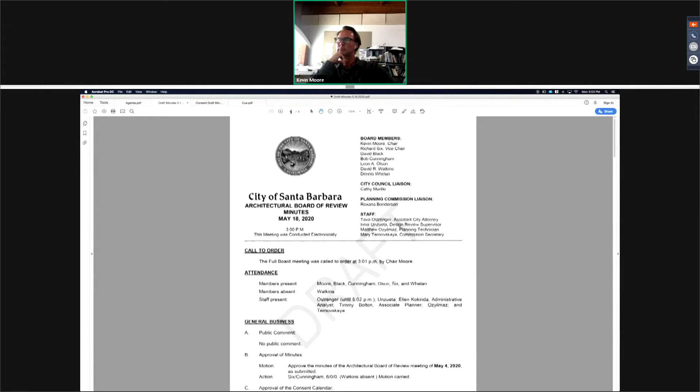Yes, if we go to page 6 of 6. Okay. So under my comments on this particular project, what is it?

200 Helena Avenue. I'd like to change my comments after the words, but he would like input from the Historic Landmarks Commission. I would like to say he would like to be informed of the process to get comments from the Historic Landmarks Commission. I wasn't ready to go to landmarks right away, I just wanted to know what the process would be.

So Mary, did you get that? Yes. So it would read, he would like to be informed of the process to get comments from... Okay, and then on that same comment, just to clarify, the last sentence: he would like the applicant to consider making the stairway exit out to the roof inboard of the perimeter so that the roof can be sloped down.

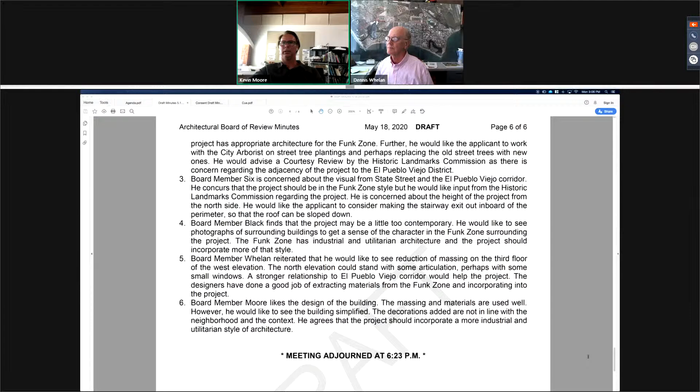Are there any additional edits or comments? Okay, does the maker of the motion accept those two changes? Yes. Okay, and the seconder? Yes. Okay, so why don't we get everybody on screen, and let's do our roll call vote.

All right, this is Mary, I will take the roll call vote. We have Chair Moore, yes. Vice Chair Six, yes. Board Member Black, yes. Board Member Cunningham, yes. Board Member Olson, yes. Board Member Whalen, yes. All right, motion passes.

Okay, we'll move on now to the consent calendar, approval of consent calendar minutes for May 26th.

All right, Mr. Chair, if I could have those pulled up. Perfect, thank you Timmy. Sorry, my cat's in the way. You've got to move. All right.

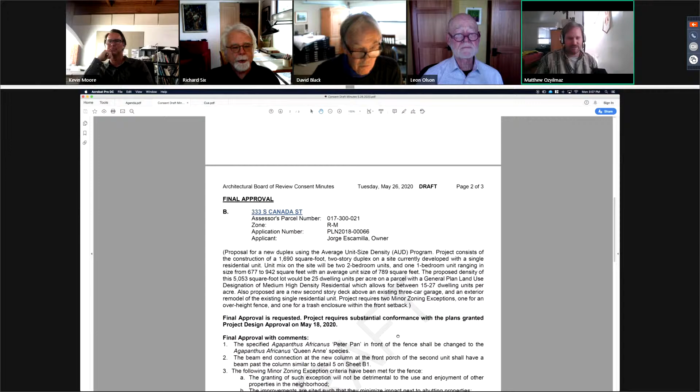Item A, 2520 Bath Street received approval of its review after final with comment. Item B, 333 South Canada Street was given final approval with comments. Item C, 29 South Milpas was given project design and final approval with comment. And I believe that was the end of the agenda.

Okay. Somebody want to make a motion for approval? I move we accept as presented. Okay, first by Mr. Olson, second by Mr. Black. Any discussion? No? Okay, let's have a roll call vote.

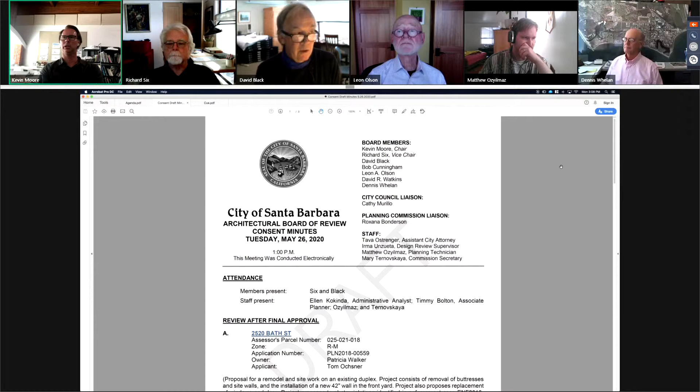Okay, this is Matthew. Mary, you may have to turn off your camera so we can have all six of us. Sorry. Okay, there. I'll take... we go.

We'll take the roll call. We have Chair Moore, yes. Vice Chair Six, yes. Board Member Black, yes. Board Member Cunningham, yes. Board Member Olson, yes. Board Member Whalen, yes. Okay, motion passes. Okay, great.

Thank you, and now moving on to June 1st. Mr. Chair, we did not have consent today, it was canceled.

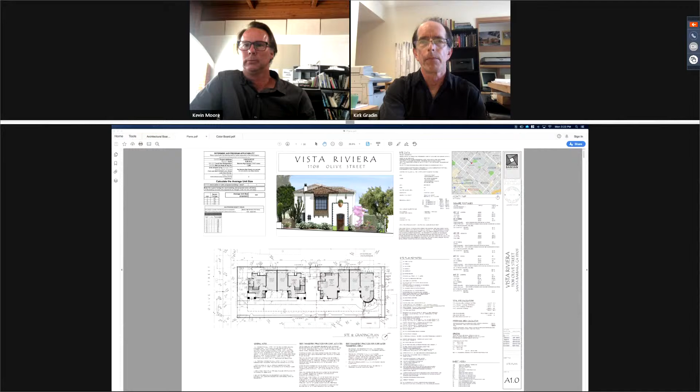There we are. Welcome back. And forgive me, Mr. Gradin, if you wouldn't mind unmuting yourself. You're currently muted. Yes, there I go. I just successfully was able to do that. Thank you. Okay.

Yeah, if you could introduce yourself and go through the changes to your project. Okay, so I'm getting some background noise right now. I'm just wondering, Kirk, if you could—do you have any headphones you could use, or are you using your computer's audio, or calling in by phone? I'm using my laptop audio. Okay, that sounds better. I don't know, I was just getting some feedback. Please go ahead when you're ready. It sounds like it's okay now.

All right, thank you. Kirk Gradin, architect for the project. It's been a while since we've been in front of the board with this project. It was July last year, as we just heard. It was appealed to City Council, and the council denied the appeal on September 24th. So we're now back with very minor changes, and also some additions addressing comments regarding the landscaping from the last time we were there. We also have a full set of plans now with architectural details, lighting, and so on.

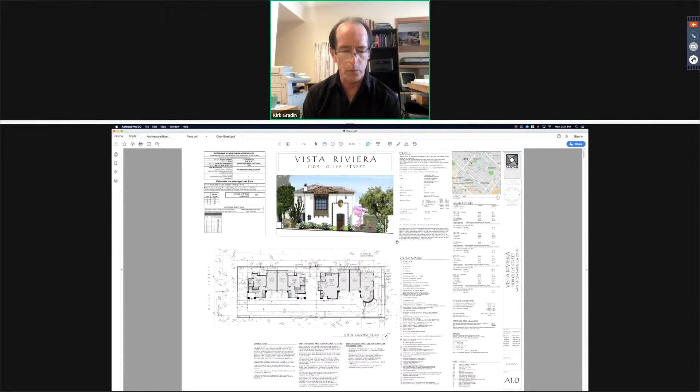Since we're looking at the site plan here, we did have a change in square footage, which was a reduction in Unit B, the second unit from the street there. It was just a small reduction of unit size from 861 to 824 square feet, so a little less than 40 square feet eliminated. That was due to increasing the size of the yard between the duplexes—that's how that reduction was made.

Because of some minor changes to the grading in order to make it work out with the civil engineer's design, we also have some steps now. Unit A, on the south side at the bottom of the page, going up to the entrance, there's 2 steps. Same at Unit B, there's 2 steps, and then there's just 1 step at Unit C.

In addressing—you'll see this when we get to the landscape plan—the issue having to do with the trees we had planted along the south side property line, we now have some tree wells that are drivable with tree grates along that south border. You see those 5 little bump outs, and then there's some planting changes. Well, I'll talk about the other changes as we go through the drawings. So we can go to the next sheet, which is floor plans.

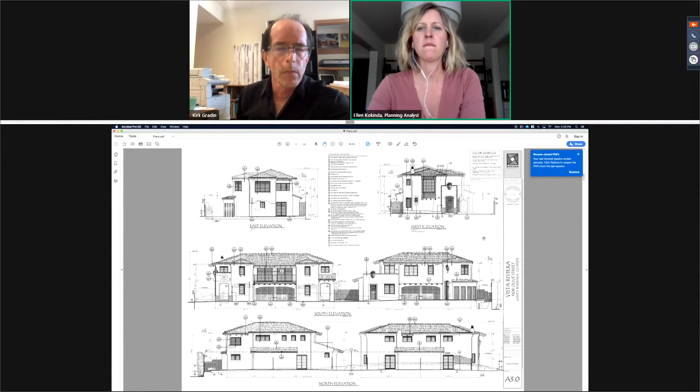Those board members who were present for the previous review last July may remember these elevations. There are very minor changes that have occurred. As I mentioned previously, at Unit A towards the street, there's a couple of steps that were added at Unit A and B at the entrances.

Actually, this also, because of the grading - initially we were thinking that we would be able to slope both the north and south sides of the property all the way to the street, continuous drop. But on the north side, because of that narrow area between the building and the neighbor, the civil engineer worked out a different program where he's actually sloping in 2 directions at each unit. So that fence that divides - if you're looking at the north elevation there's a fence at the first floor that divides Unit A from Unit B, and a fence that divides Unit C from D at the rear unit. Basically the grade slopes away in either direction from that fence to catch basins, and then that flows underground and exits at the street at curb level.

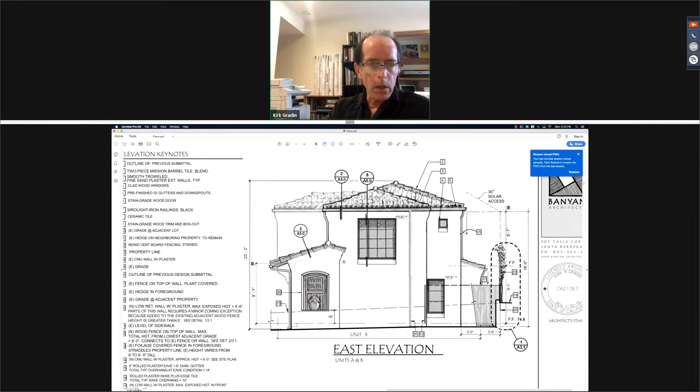Other than that, there was no change to both of these elevations on this page. Other than, again, you're looking at the back side of Unit A and B, and we have dropped the plate height there - you see it's 8.7 instead of 9.1 which is what it used to be. So we could go on. I don't need to look at these sections - architectural details.

You'll see these are very traditional in nature, recessed windows, two-piece mission tile with mortar bird stops. We have both the soft curving plaster eave in most cases, which is the third detail up from the bottom on the right-hand side. That's a typical eave, but there's also some instances where we have outriggers, which is shown on the next sheet. Most of these you'll recognize as being very familiar to the El Pueblo Viejo style in which we're working.

So we go on to the next sheet unless there's questions. Well, that will come later. There's at the bottom, in from the right a bit, the outrigger detail. The top right is the bay window at the street.

See anything else significant here? Grill detail on the bottom left. The kind of soft curving feature that we have at the garage door entrances is on the bottom left there as well. We have a couple of plaster columns shown near the bottom left. And then the wood, kind of fake wood post in between the garages, between units, is near the top left. So it's a wood veneer to make it look like a large post.

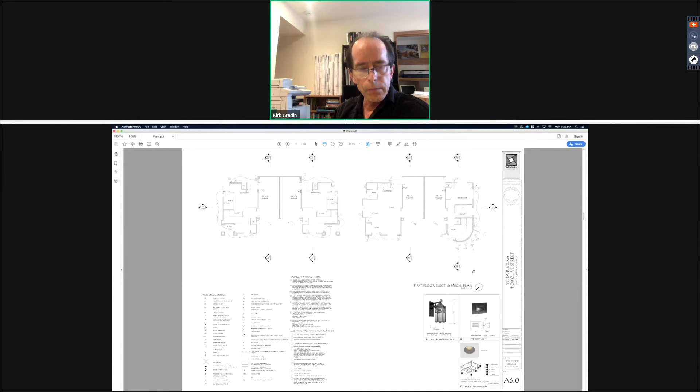I think we can go on. So, exterior lighting - we've selected a single Handelman fixture, and all the wall-mounted fixtures will be that fixture shown on the right in the cut sheet. Wherever we have step lights, they'll be covered with a downward pointing grill, also shown there. And we do have some exterior downlights that are tucked under overhanging plaster eaves, shown there - it's a very small recessed can with a 2-inch aperture.

So we can go on. Second floor lighting - there's not much there, and nothing visible from the street at the second floor. You can go on, please.

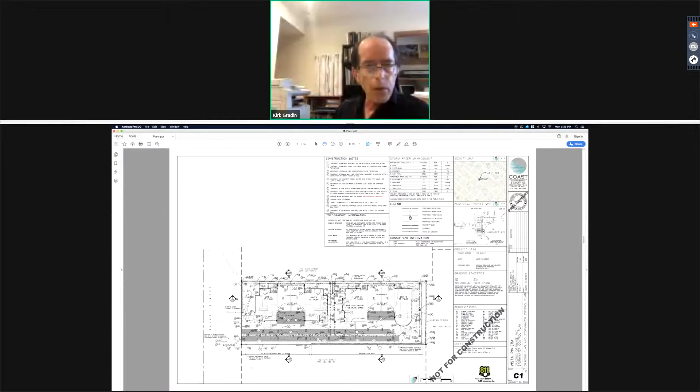Window schedule, civil. Civil engineering, I'm not going to help with this, go on. Go on, thank you. Next page, please.

So I think we missed the first landscape plan sheet. I think there's one prior to this, actually - L1.0? No? This looks like the hardscape plan to me, doesn't look like the landscape plan. It's not the landscape plan. So this is the hardscape plan. I think it appears that we're missing the sheet - I don't know how that would have happened. Either that or it's getting skipped over, because that's crucial. We need that landscape planting sheet.

But anyway, this shows basically we have three kinds of surfacing. The driveway is a permeable concrete, which doesn't require control joints, so there's none shown. The pedestrian pathway is a permeable imitation brick, and some of the other small patios are the same. And then there's a gravel that also works as a mulch for the planting area. So it's a xeriscape kind of look that we've been talking about and representing from the beginning, reinforced by that gravel base. So we can go on.

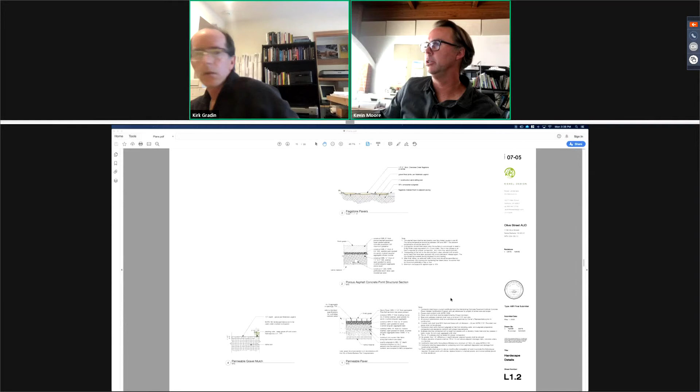And Mr. Gradin, unfortunately we don't see L1.0 on the plans that are on the city website either, so not sure what happened there, but let's keep moving forward. Mr. Chair - yes, there is a planting plan, L3.1. Is that? Maybe it'll take care of it. Let's take a look, let me see. Oh, there we go - yeah, there's irrigation and further on. Yep, there it is, 3.1 please. Oh, okay.

So the changes made here were addressing comments from last time. So this is a planting plan, very close to what was reviewed previously with a few minor changes. One of them that Mr. Cunningham, board member Cunningham, had asked for was a greater variety of canopy trees. So originally we had 5 olive trees along the driveway, and we switched one out to an acacia. So we now have 3 acacias - stenophylla, the shoestring acacia - 2 along the north side for screening, and 1 near the driveway entrance.

We also were struggling, going back and forth, along the north side of the property because the neighbor was concerned that we not put planting that was going to increase shading on their property. They didn't want anything along there that was going to exceed the height of the building. We experimented with different things, and what we've come up with is a series of Strelitzia nicolai, giant birds of paradise, that are basically not going to grow higher than the fencing and hedge that's already there.

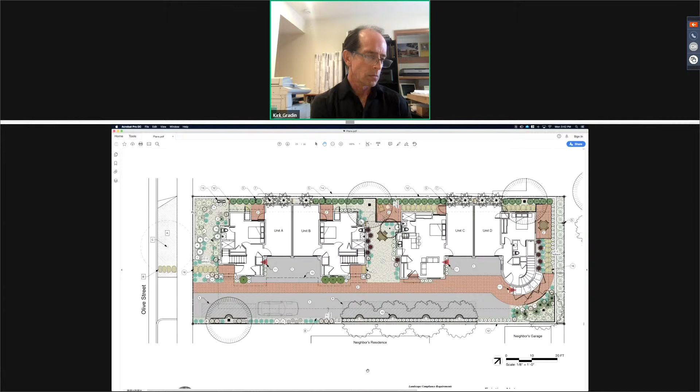Let me see if there's anything here in my notes that I wanted to mention. I think I covered it. Oh, there is - if you go further on, there's detail for the grates along the driveway and some other planting details. It's probably too far now, we're into notes.

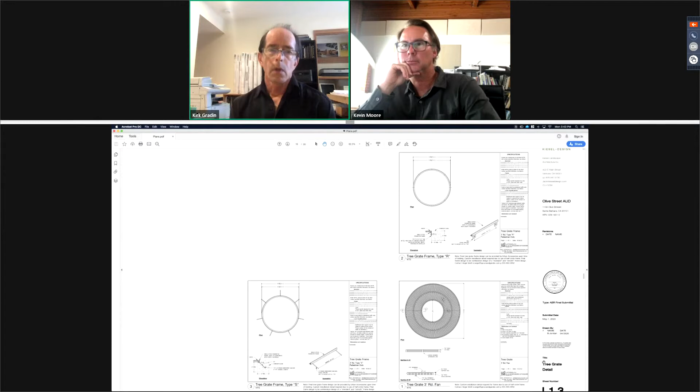And let me see if I can find the page for you now, where the grate detail is. There we go, L1.3. Thank you. That concludes my presentation.

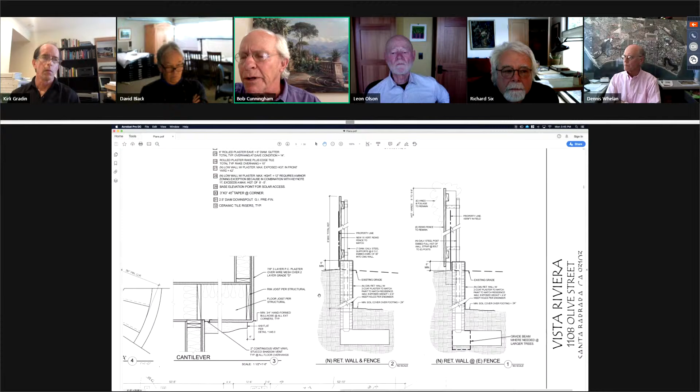On the north elevation, the window alignment - and I'm sorry, I'm skipping back and forth on drawings, so I'm going to challenge Timmy to find what I'm talking about - north elevation, units A and B, the 4 windows on that elevation are somewhat, I don't know, contemporary in appearance, and obviously very symmetrical on that elevation. Is it possible for you to vary those in any manner to give it a little more interest?

Well, I'm sure we could. For example, we could make one or more of them a single instead of a double, if that was desirable. The factor about the height of them, however, we feel pretty settled on, because we're wanting to maintain privacy in relation to the neighbor. So the ones on the two outer ends on unit A and B, the outside ones, those are both bathrooms, so privacy is especially a concern. The other two are bedrooms. But it was a request specifically by the neighbor to limit the capacity at the second floor for the tenants to view and look down into their yard and onto their building. So that's why the sill height is where it's at. Okay, I appreciate that. I'm just wondering whether you could vary the windows in any way to depart from the obvious symmetry. I know you've added the chimney and the roof pop-out on unit B, which is nice, but I think the window alignment is still somewhat monotonous, and I'd just like to know if you can vary that, even to a minor degree, to get away from that symmetry.

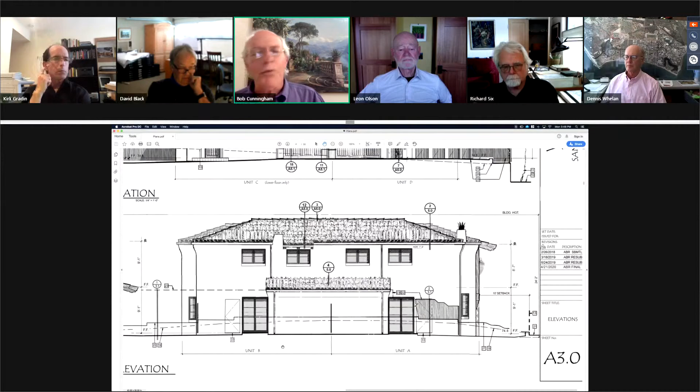Sure. Okay, thank you. Can you point out - and again, sorry to jump around here - on the irrigation plan where the backflow preventer is located? Yes, it's top left. Yeah, there it is, that little rectangular box there. On the north side, it's hidden by the retaining wall running along the property line, which drops the grade about 32 inches or so. And then there's planting as well to protect or reduce the visibility from the street. Okay, thank you, that's a nice location.

Final question. Can we go back to the planting plan, please?

Could I make one other comment about the symmetry issue? This was brought up and discussed on several occasions as we went through ABR, and also at the city council. My argument was that you find this as a very typical feature of traditional Spanish colonial and El Pueblo Viejo design and massing features, where there's both symmetry and asymmetry. The front two units are symmetrical, the back two are asymmetrical. That was kind of the play that we had going on.

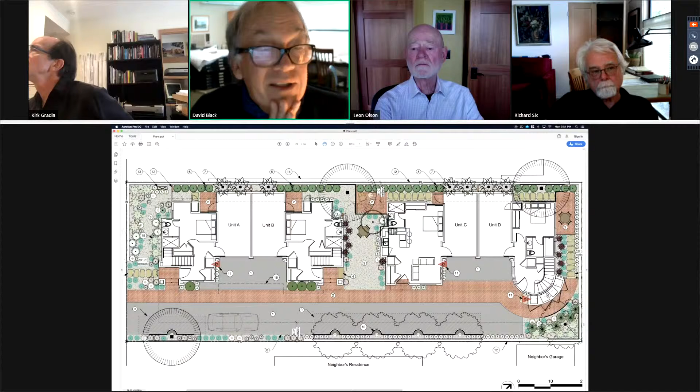Well, what does that dimension occur in the side yard there? How much room do you have to plant those? It's between the garages and the existing fencing, and the property line, I believe it's 3 feet. Those are not areas that you would need to access.

Well, except if you wash windows or paint the building at some occasion. There's no windows there, but yes, to paint the building you would need to get back there. 3 feet, I don't know, I'd like to get Bob's feedback on that too, but that plant is capable of getting quite large. So just a heads up for you guys. It will get some height, but 3 feet is not much room.

Since David mentioned my name, I would add that he makes a very good point. I think it's worth trying for the purpose that Kirk stated, but they will demand maintenance as they grow, and they'll need to be controlled because they can get huge. Just a heads up, Kirk. That's the only question I really had. Okay, Mr. Olson, any questions?

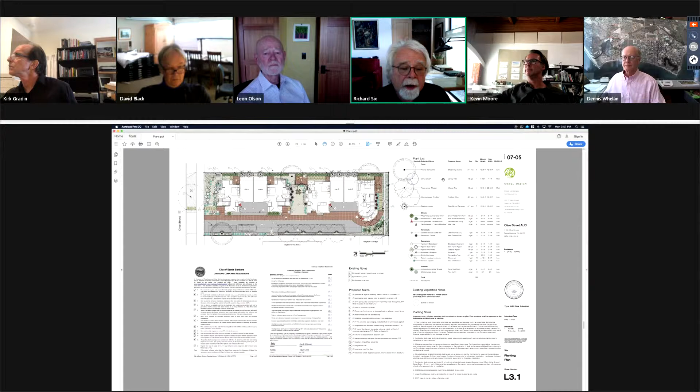You don't have a detail on the interior. I understand fully the details for the fencing along the north and south property lines, but what is the detail of the fencing in between the common yard and the middle of the project? Did you detail that, or would it be similar? No, we just call it out as one by redwood vertical. We do show it on the elevation, but it hasn't been detailed on the plans yet.

So it would just be a simple wood post and rails? Yes. And if I remember correctly, the reason you're not fencing the south or back property line is that there's already a huge hedge there by the neighbor? Right, there's existing fencing. Wherever we're not showing new fencing, there is existing fencing.

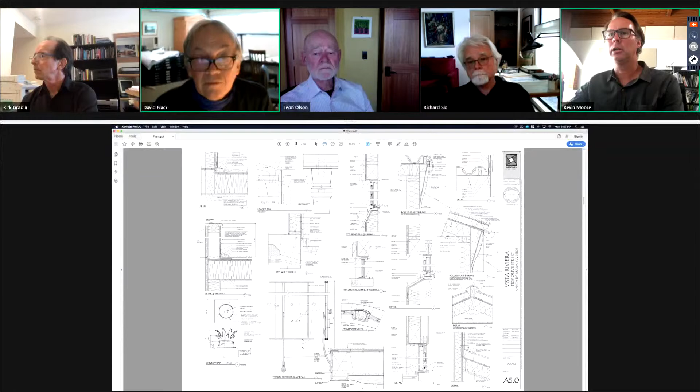Okay, I have no other questions. Mr. Whelan, no questions. I don't have any questions either. Did we get everybody? I think we did. Yep. All right, let's move on to comments and move our meeting along.

Let's start with Mr. Six for comments. I find it an exemplary project, with a few cleanup items such as making sure the specifications for the windows are on the plans, and the detail for the interior fence is on the plans. I don't have any problems with the symmetry of the windows on the front two units on the north elevation. Those are my comments, and I think it's ready for final.

Mr. Olson: I also think it's a handsome project and it's ready for final. Mr. Black: I would concur with those two comments.

Okay, no concerns for the landscape? Any comment there? Well, as I indicated in my questions, I think the use of the giant birds is somewhat problematic. I think the landscape architect should look at that and make sure he understands what he's getting, or what's going to happen down the road with it. So that's all.

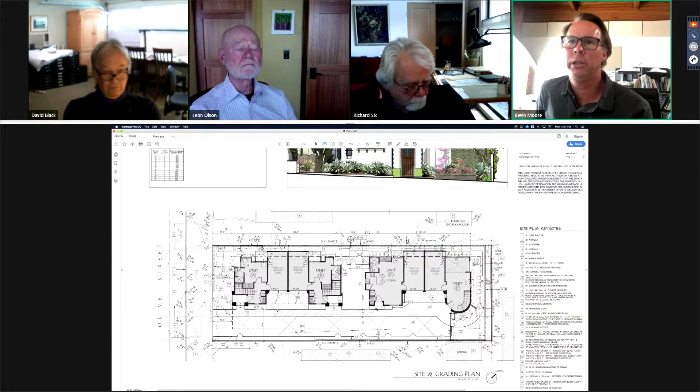Thank you. Okay, thanks. Timmy, can you flip to the landscape plan L3.1? Let's just zoom in on that southeast corner, the lower right. There we go.

And Bob, your concern is just the fig tree may not provide enough visual screening? Yes, it probably will not reach more than 20 feet ultimately over its lifespan. And it's a deciduous tree, so 3 months out of the year, it's not going to provide any effective screening. And again, it's a large planter, it's a nice opportunity to have a fairly large tree.

Okay, Mr. Whelan, any comments? I agree with the other board members. It's an extremely handsome design, full of the Santa Barbara details we are all so enamored of. I would underline the landscape comments by our two professionals about the Strelitzia. This is one of my favorite plants, it just begs to be seen. Besides it being very large, no one will ever see it back here, and it seems like a waste of a really handsome plant. And then a second landscape comment would be the acacias seem to be very close on the north side to that block wall, and even on the south where it's less of a problem. But I question the size and location of those trees. That's all I have.

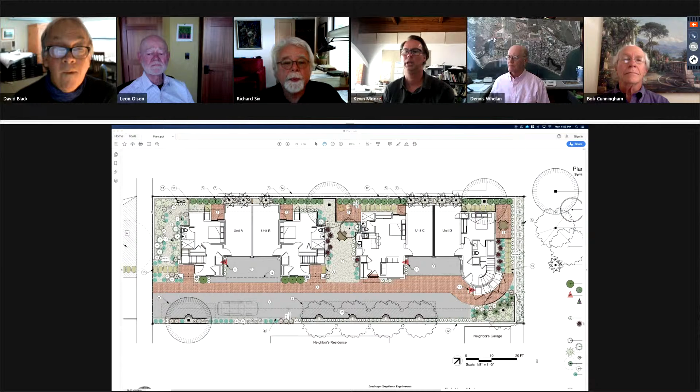All right, this is Mary, I will take the roll call vote. We have Chair Moore, Yes. Vice Chair Six, Yes. Board Member Black, I'll go along with it, yes. Board Member Cunningham, No, I believe we need a larger evergreen tree. Board Member Olson, No. And Board Member Whelan, I'll vote no, I don't really think any tree is necessary there. The adjacent properties, there's no view involved, and this would perhaps give some view from that unit D.

So I'm sorry, then your vote would be yes, you're accepting the fig tree? No, the vote is no for not accepting the fig tree. Or you want an evergreen? I would not put any tree at all. That's not the vote, that's going to be difficult. So, okay, the straw vote was, is the fig tree the appropriate tree for that location? Your vote is no, I'll vote no on the fig tree, okay, so that's a tie. So the motion fails, the vote is a fail, yes.

I'll make my motion with the fig tree and see where it goes. Or is that redundant? No, let's do that. Okay, so I will make a motion for final approval with the following comments, that this is an exemplary project and we'll be happy to see it developed, with its sensitivities toward the neighbors noted.

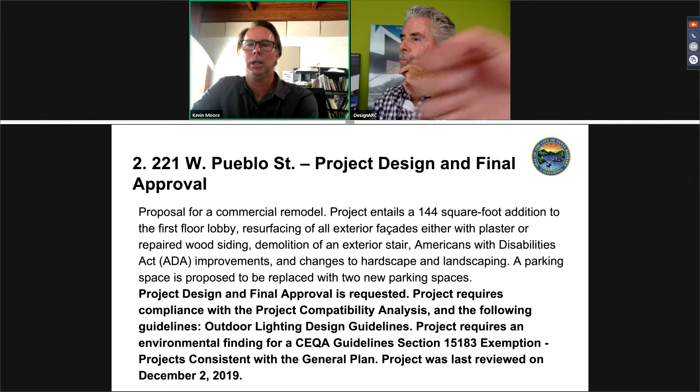We're moving on to item number 2, 221 West Pueblo Street, a proposal for a commercial remodel. The project entails a 144 square foot addition to the first floor lobby, resurfacing of all exterior facades with plaster or repaired wood siding, demolition of an exterior stair, ADA improvements, and changes to hardscape and landscaping. A parking space is proposed to be replaced with 2 new parking spaces. Project design and final approval is requested. The project requires compliance with the project compatibility analysis and the outdoor lighting design guidelines, and requires a CEQA guideline sections 15183 exemption. The project is consistent with the general plan, and was last reviewed December 2nd of last year.

It looks like we have the applicants here. You may have to unmute yourself, and introduce yourself. Can you guys hear me? Yes, we can. Yes, we can.

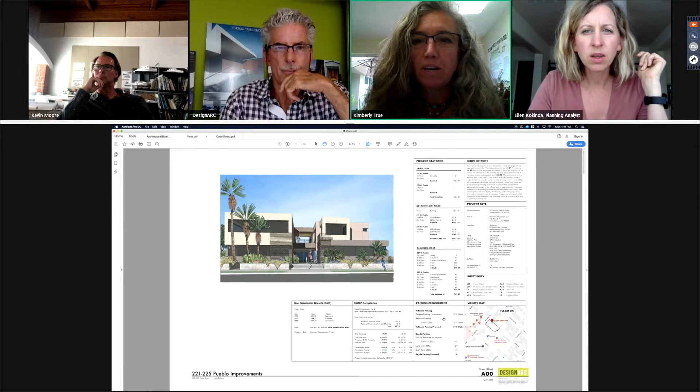This is Ellen Kokinda, I'm picking up some background noise, if we could just do a quick audio test. Chair Moore, I went ahead and muted you because I thought it was you at first. Kimberly, could you test your audio please? I just unmuted, can you hear me? Yes. I'm sorry, you'll have to introduce yourself, Design Arc, if you could test your audio as well. Hello, I'm Mark Shields, representing the Sanborns and Design Arc today. Okay, all right, I think that's okay. So please go ahead when you're ready. Thank you.

True Nature Landscape Architecture.

Welcome. Matthew, do we have the comments from the last review? Yes, we do. Great, so it's continued indefinitely. The board gave the project positive comments: provide more information on the screening elements, relate the planter retaining wall material to the neighborhood, maintain proposed trees and add additional evergreen trees in the parking lot, consider removing the Mexican fan palm in the front yard. The colors as proposed in print form are acceptable, but provide color swatches. Mechanical screens shall be sympathetic to the materials used. Refine the locations and design of the horizontal sunscreens on the roof. I'll turn it over to you, and you can walk us through what you've been up to.

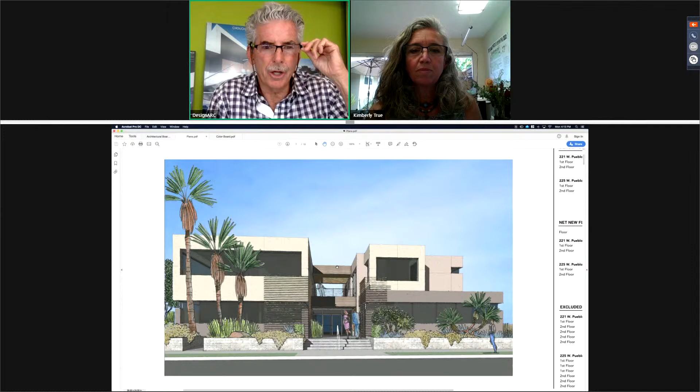Thank you, good afternoon members of the board. I'd like to start with a quick sketch of the front elevation, if you could enlarge that visual a bit. Just a general synopsis: we inherited this project from the owners, Tom and Barbara Sanborn. It's located on West Pueblo Street, between De La Vina and Bath. It was a dilapidated early 70s office building, and the owners really wanted to rehab it and make it more attractive for potential new tenants. Right now it has horizontal and some vertical cedar siding that's badly deteriorated, with damage from woodpeckers, warping, and discoloration. So overall, we want to give the building a nice facelift. There are two buildings essentially attached.

I'm sorry to jump in, but I think we were all present for the initial review of this project, so I'll jump forward. Show us briefly how you've addressed the comments that were made. Okay, want to go to the second page? One more. Okay, if you could expand the floor plan a bit.

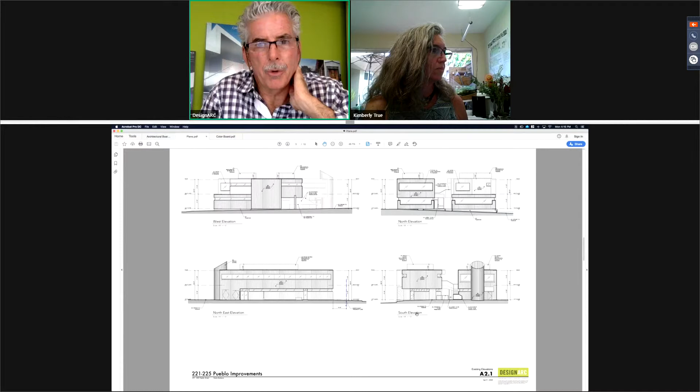Those are the existing elevations. The only thing of note here is in the upper right-hand corner, if you were to expand that elevation - the central space was a convoluted mess of stairways and balconies and whatnot. We've completely gutted that with our new combined lobby. So we can move on now to the final elevations.

Our proposed elevations, again, replace the cedar siding with plaster. We've retained 3 different plaster colors to give the building a nice contrast between the layers, trying to really modernize the look of the overall building. The connection between the two buildings is cedar stained, and the mechanical screens are actually existing - you mentioned that in your comments. The one on the more easterly building, 221, is, I believe, metal, and we plan to repaint it. The mechanical screen on the more westerly building, 225, is wood, and we plan to repaint that as well. Those are not shown in these elevations.

Overall, we're keeping the existing windows and really not touching the building much, except for the interior lobby area, and redoing the cedar siding with plaster, which would be integral color plaster.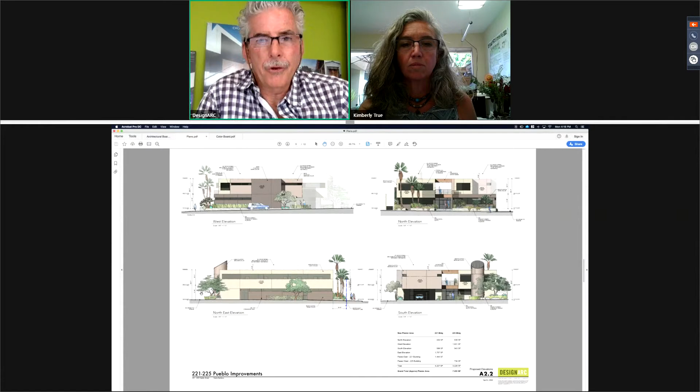Moving right along towards the parking area. There were some questions about the horizontal louvered screening, and I have a sample of it here. We studied the various locations for the screening—it's a thin metal product, a sunshade designed by Louvertech. They make some shapes that are airfoil.

We thought that was a bit too contemporary for this project, so we're proposing these horizontal rectangular louvers instead. The section is rectangular, and they attach easily with vertical cleats to the facade of the building, covering the existing large, expansive, somewhat awkward dark windows, which we're keeping. We studied various locations and are comfortable with where we've placed them. We eliminated some louvers on the back side of the parking area but kept the horizontal louvers in the front on Pueblo Street.

We're proposing to keep them the dark anodized color to match the existing dark anodized aluminum—I think they're old Kawneer window frames that the building is primarily composed of. The windows are recessed deeply, and there's a canted sill that is now a dark color to match the windows. We plan to paint that a bit lighter just to lighten up the depth of the darker looking windows. Overall, we're attempting to give the whole building a nice fresh look and make it feel a little more upbeat and attractive.

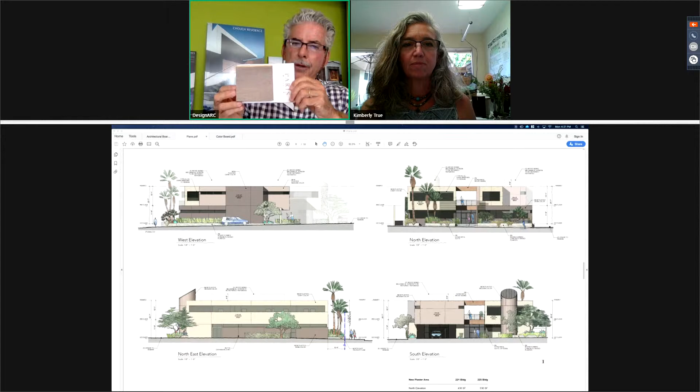The wood siding that connects the two buildings in our central remodeled lobby is going to be stained a light gray color, and the slope sill are going to be this color. Yes, Matthew, sorry, one moment.

We do have a color board—I know the physical samples tend to be more helpful, but we do also have a color board for reference. There it is.

So that's the synopsis of where we're headed with the colors. We also have railings in the deck area between the two buildings, which will be stainless steel tension wire railings with vertical dark anodized aluminum supports, not shown here on the color board. I think that wraps it up for the exterior.

If Kim wouldn't mind stepping forward with the landscape plan. One more—there you go. Okay, can you hear me?

Yes, we can. Great. Hear you.

Going back to some of the comments we had, we've added evergreen trees to the southern parking lot perimeter. There's an existing island oak there that's disfigured from topping - calling it disfigured is being polite. The structure isn't salvageable, so we're proposing to remove it and replace it with an evergreen olive.

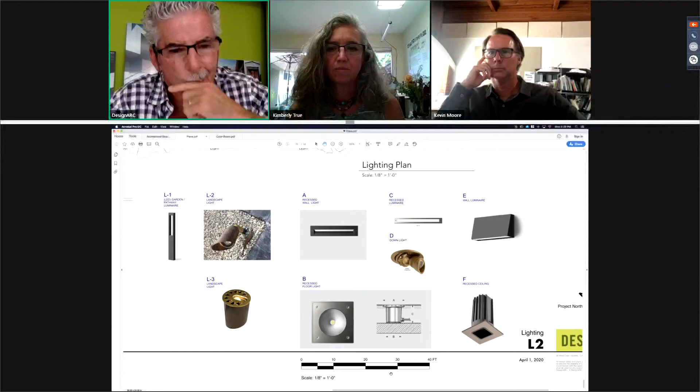The other existing wall luminaires we have are Vega, which is light number E. We have some recessed ceiling lights, F, at the lobby entry downlights, and recessed floor lights in the entry as well, but they're not out on the street. The landscape lights are shielded, that would be L3. And our parking bollards, L1, are spread throughout the parking area.

Okay, can we just go up to the plan really quickly so we can identify where those are? Zoom in, there we go. So L1 were the bollards. L1s are there at the entry, you can see two of them flanking the entry to the back of the building, which is off the parking. There you go, okay.

The recessed step lights are A, which are in the walls, the linear step lights. The landscape lights are L3s, there and there, we've got some beautiful existing palms in the front. We're gonna uplight just a little bit. And the B is an uplight, which is a recessed uplight in grade, right there.

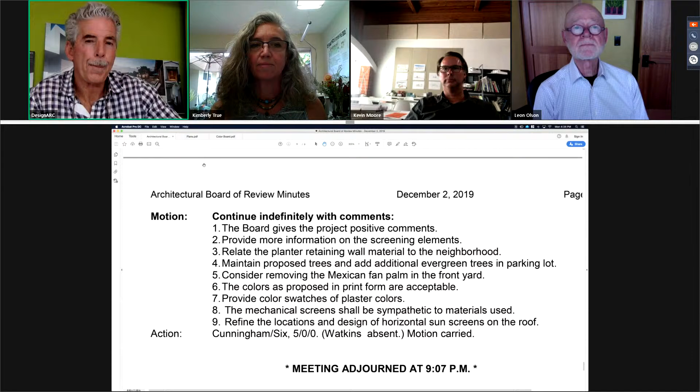No other questions? Okay, Mr. Six, any questions? Yes.

So I thought we had a comment and concern about the material of the front retaining wall, as we see right here at the front property line. I thought, Mark, was it not poured concrete or formed concrete now? And we considered that it might be better with a stone veneer. What is reflected now?

Right now we have board formed concrete, and it was just a request to study that from the board. Both the owner and I have walked up and down the street on West Pueblo there, and there's really no defining frontage street walls that are exceptional in any way, shape, or form. It varies from a low plaster wall to landscape to a brick wall, and so there's really no direction in terms of what should be there.

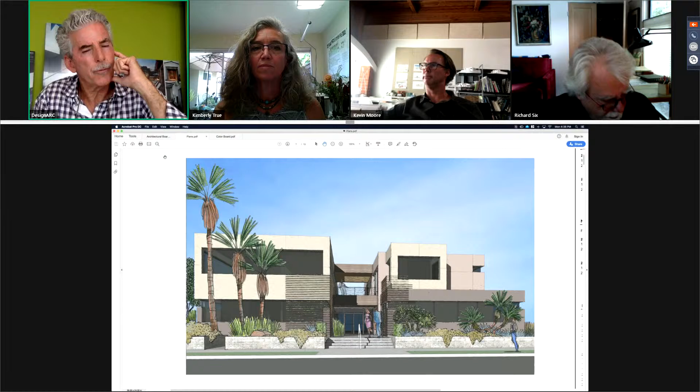Now these louvers dressing the entries, they will be black, and they will have vertical supports behind them, correct? Yes, they're spaced quite far apart. The louvers are kind of a dark anodized bronze to go with the existing Kawneer dark anodized bronze storefront, and the vertical supports are the same anodized color.

And then, can we go to the site, the architectural site plan?

So you show with your pink or purple cross hatching areas where you're patching the asphalt. Yeah, like when you bend around the curve of the drive and the entry, that's where we're expanding the curve of the driveway. So that's a patch.

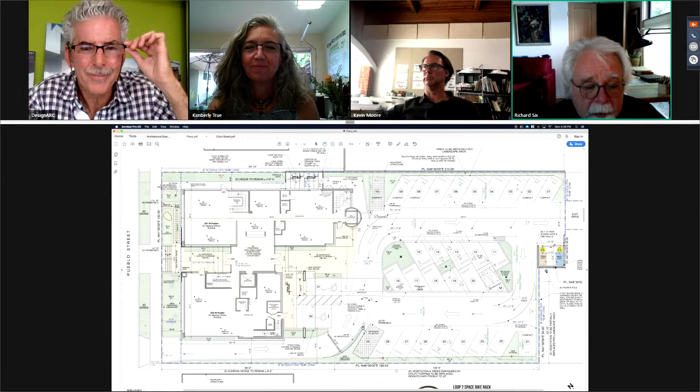It seems like the existing drive as it comes up past the building is concrete material, is that correct, or is it asphaltic concrete? On the west side, right above where the driveway curves, where we just had our hand for the purple patch, right above that you see an arrow going both ways with a spot, one says concrete, one says asphalt. Is there a change in materials there?

Yes, there is, it's existing concrete where it meets the asphalt drive. Okay, so the existing concrete will go all the way back to the pedestrian materials, and what is the extent of that concrete to the left of us? Does it stop or go into... Yeah, it joins, there's a line shown that shows the shape of it. It's simply because it's existing, it's hard to see. This line here, that's the concrete.

It goes up to this new parking and terminates. So actually, these will not be asphalt, we're gonna have to match the adjacent material, which is concrete. So where does the concrete... The concrete essentially extends all the way up to the larger arrow towards the eastern edge of the property, and we're going to match that where you'll see the new permeable paving for the small single car parking stall, number 10.

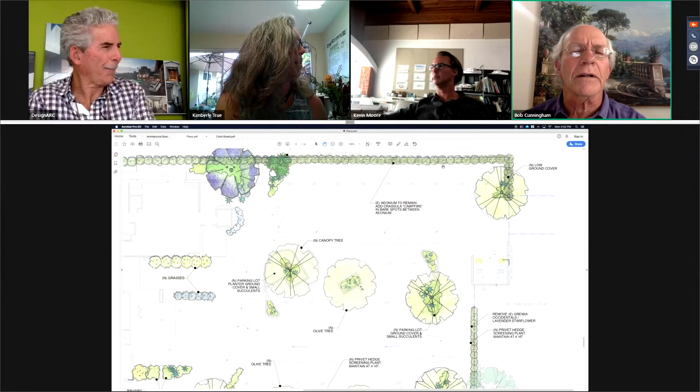And then along the eastern and western edges of the parking lot, same theme, can you expand those edge planters to achieve a little more planting area? Again, it looks like if you were to draw a line parallel to the property line, bring it out about 2 more feet, and just have a continuous curve rather than all those wheel stops, you would have a larger planter and less costly maintenance over time with the wheel stops.

That's a question. That's a good question for the city if they'll let us do that, but we'll study that for sure. I think anything we can do to increase the size of the planters is a good approach.

There's a large wall on that side of the property. So I don't know if we have footings underneath there, but definitely might be able to do some planting. But I don't know that we'll be able to get trees in there. We'd have to do some investigation on that. I'm not implying that you should put trees in there, I'd just like to see a larger planter if you can accommodate it.

Great, larger footprint. And finally, I do not see you are on the agenda for the Street Tree Advisory Committee's next meeting, which is this coming Thursday. So you'd be waiting another month to get that determination regarding the setback Washingtonia palm tree. Does that fit within your schedule?

It would be the first Thursday in July. I think if we were to apply, depending on the board's purview about their decision about that tree, I think we would apply ASAP, and we still have to do the working drawing, so a month is just about right. Okay, that's great, thank you.

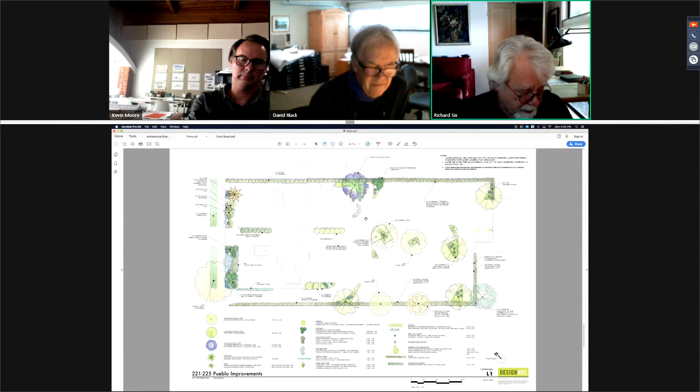I think that's about it. It's agendized for final, but I think it's certainly not ready for final as the working drawings haven't been done. So I think PDA is appropriate for this at this time.

I'm still a little, if we go to the front elevation, I still think that the vertical louver above, on the right-hand side as we're facing it, above the low roof, is contrary to how you're using the screen. I would suggest that you take it down to the level of the gray horizontal soffit, but that's a minor issue for me, but I think it would look better if it was taken down to that. Other than that, that's my comments.

Good project. Oh, excuse me, one more. I do think that Bob's comment on the quote unquote non-uplight flooding the palm trees is not appropriate and would easily, with the owner's manipulation, violate the outdoor lighting guidelines. Okay.

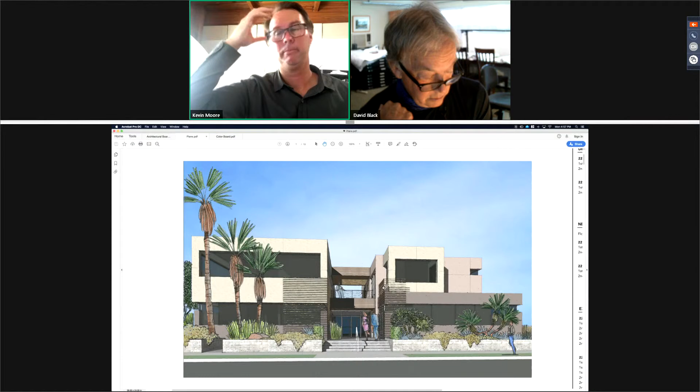David? Architecturally, I agree, I think it's a really nice improvement, and it's really going to be a nice project. And relative to the landscape, I'll just say that I'll just look forward to seeing the final plans when they come back for final. That's all. Oh, okay, Bob? I could have you on screen. Actually, let's get all the board members on the screen.

I think this is a really nice project. I think I said that the first time it came through. I would just ask that the applicants explore every possibility for expanding landscaping in the parking lot, including adding trees where they can fit and expanding the planting to accommodate as much open ground as possible. Thank you.

Mr. Whelan: To reiterate other comments, it's a very fine project, a nice updating of a building, making it look very fresh and contemporary. The only small comment is that the retaining wall on the street, consider the potential for it to be a skateboard attraction. So some strategy towards skate stops or a rough brick on the top might be considered.

All right. Mr. Olson.

I also think it's an excellent project, and the changes from last time I think have improved it. I am in agreement that the board formed concrete in front is acceptable, and I think it's improved as is the color. My only concern is that I don't remember where the rooftop screens are, but it seems to me that they have more significance to this elevation than the drawings indicate. That concerns me a little bit. And that's all my comments.

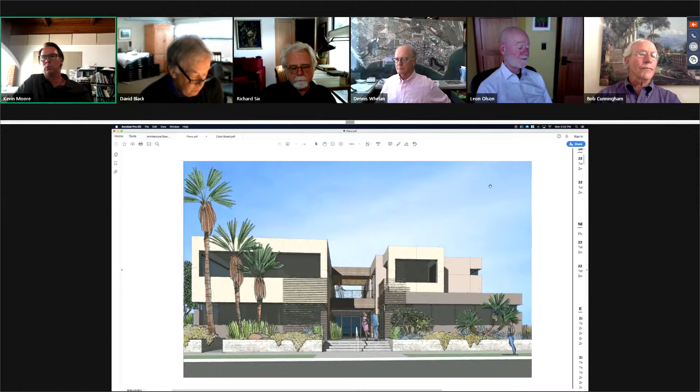So I would make a motion for an indefinite continuance back to the full board for project design approval, with the following comments: that the board appreciates the quality of the design updates to this building, and would like the designers to continue to look for additional landscaping opportunities throughout the project, in particular within the parking field, to expand any planter to the greatest extent feasible, and that all exterior lighting shall be true downlights.

With no uplighting of landscaping, and that the colors and materials as presented are acceptable, and that the designers provide a front site wall that is of a material more sympathetic to the neighborhood and the surrounding area.

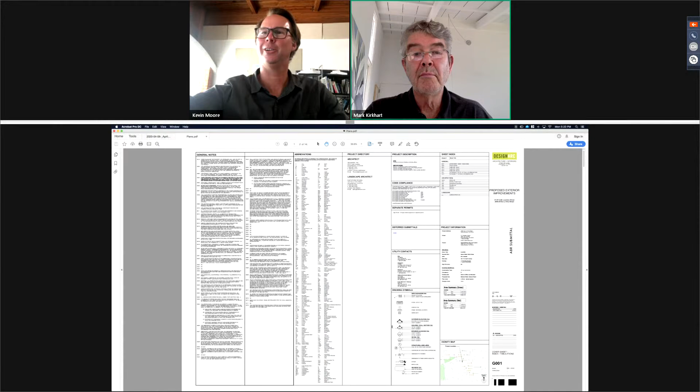Mark Kirkhart, Principal, DesignArc Architects, next door neighbors to this project. Our office is exactly next door. I'm just going to do a quick introduction, and then Thomas Hashbarger, the project architect, is going to take you through the balance of the presentation.

I just want to reiterate, this is basically a simple storefront replacement and window replacement on the existing facades that are on Calle Laureles and wrap around onto De La Vina. The bulk of this project is the interior tenant improvement for Dr. Doug Katzeff, ophthalmologist, and adjacent to that is Goleta Valley Optical as part of his operation. So those are the people that are going to be occupying the building. So Thomas, you want to take it from there?

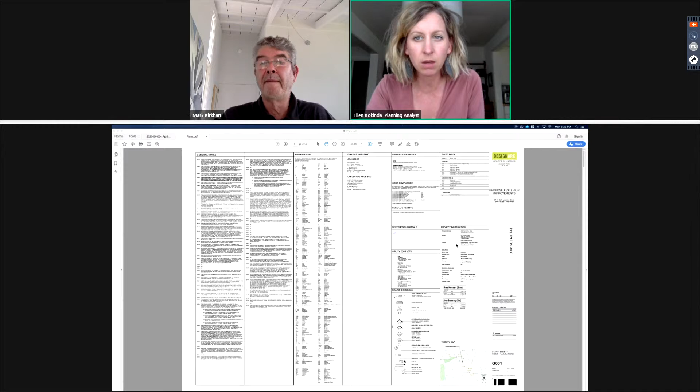All right, so maybe we could just go to page 2 where the photos are, and we can put it in context, even though this was seen pretty recently. I think it's just the next page over. Page 2. Timmy, can you? There we go.

Great. So like Mark said, it's a bit of a facelift to 2 separate portions of one building. There's a new tenant taking the entire ground floor portion on the right-hand side, which we'll refer to as the Eye Center. And then Goleta Valley Optical is taking the 2 spaces on the other side of that small wedge-shaped court there. And all of these windows that are facing street side are being replaced, including the one doorway that you see there just to the right of the fire hydrant, in front of that court space as well.

So what I thought we would do is just address the board's comments from last time in order. It might mean skipping around a little bit between the photos and the elevations, but that way we'll be sure to not miss any. Maybe take the first comment I'm seeing, that was addressing the light fixtures, but we're just proposing that those get re-lamped in place with LED light fixtures. So no change is proposed for those existing 5 light fixtures that you can see there.

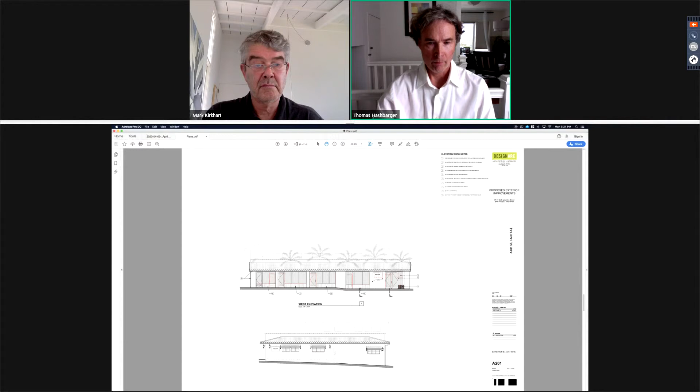If we go to the elevations, which is on page 10, the awning color, which you can see there on our material and colors board, we're proposing—we agree with the board's comments made last time that it could just be a little bit more traditional—and we're sticking with the tried and true kind of tealish gray-green color for the awnings.

There was a comment about retaining the landscape planting throughout, and we agree with that as well, and are proposing that all of the existing in-ground landscaping be kept in place and augmented.

I don't know if Sam Mavis is able to attend, but toward the end we can—actually, let's just do that now. It's the very final sheet of the set, page 14. So again, there's just simple landscape planters flanking all of the entries that go into those spaces, and then it kind of follows the curve of the relatively new sidewalk there, where De La Vina bends into Calle Laureles. And you can see the plant list there.

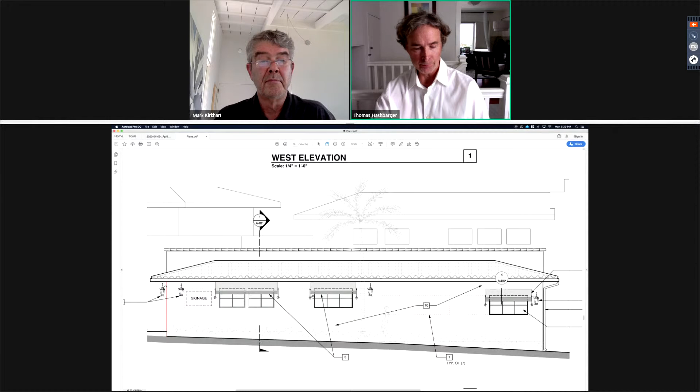We can zoom out a little bit to the elevation, or maybe the whole site for context. On the south elevation, upper left-hand corner, the board commented that they'd like to see some of the windows in that 4-foot alleyway between the two buildings retained and enhanced. But those are optical exam rooms, and it's impractical to have openings into those rooms given the sequence of patients through the building. So we focused our efforts on the entry to the eye care center and the primary storefront of the Goleta Valley Optical, just opposite the entry. Most of the focus of attention is in that wedge-shaped court directly at the back of the sidewalk.

Let's see what else we had. The final comment the board made—maybe we can go back to page 2, the photo sheet—was about potentially screening the mechanical equipment.

Oh, there's Sam, great.

We feel that the mechanical equipment is so stepped back from the street that any screening we add would just seem obtrusive in and of itself. So what we propose, and we've done successfully elsewhere including the Hotel Californian, is to paint them terracotta color. It's been pretty successful on other projects, rather than adding another screen, which would potentially block the view to the second story beyond from those windows. Rather than increase the height of the parapet or add to the bulk of the building, we'd ask if the board can consider just painting those or leaving them as is. There's no mechanical change to those units proposed by either of the tenants.

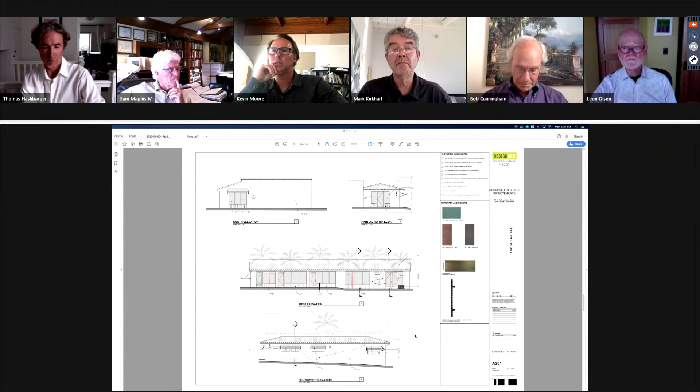I mentioned last time my concern about the exposed rooftop equipment, and again looking at it, those two units are radically above the existing parapet, and considering this project will be considerable cost because of the improvements to the interior, I don't think increasing the parapet wall would outlandishly increase the scope of the work. So I'm not happy with just painting the units terracotta. I think the parapet should be raised. That's my comment.

Okay, any comments regarding the changes to the design? No, I support the design other than the parapet height, other than the exposed equipment. I think it's a good project and done nicely.

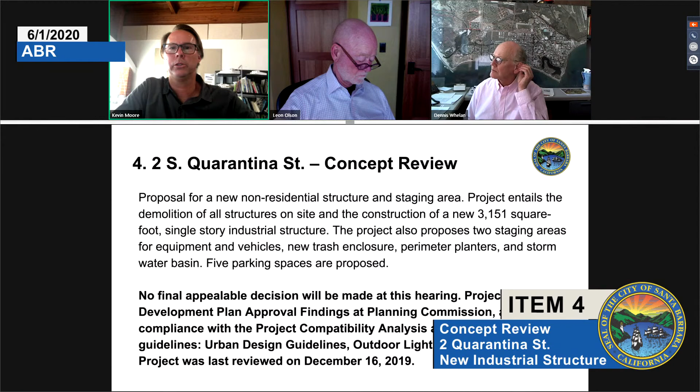Proposal for a new non-residential structure and staging area. The project entails the demolition of all structures on site and construction of a new 3,151 square foot single-story industrial structure. The project also proposes 2 staging areas for equipment and vehicles, a new trash enclosure, perimeter planters, and stormwater basin. 5 parking spaces are proposed.

No final appealable decision will be made at this hearing. The project requires development plan approval findings of the Planning Commission, as well as compliance with the project compatibility analysis, the urban design guidelines, and the outdoor lighting design guidelines. It was last reviewed December 16th.

Okay, welcome, if you could introduce yourself. John Cuykendall with Dudek, but I'm actually going to have Pablo with RJC do the presentation for the project, so if we can bring him on. Mr. Chair, I have just made Pablo a presenter, and it looks like, yes, there he is. Great, if you could introduce yourself and take us through the project. Pablo Romero, I'm the lead designer from RJC Inc. Okay, great, thanks for this project.

Thank you. Do we have comments, Matthew, from the last go-round? I believe we do. There they are. Okay.

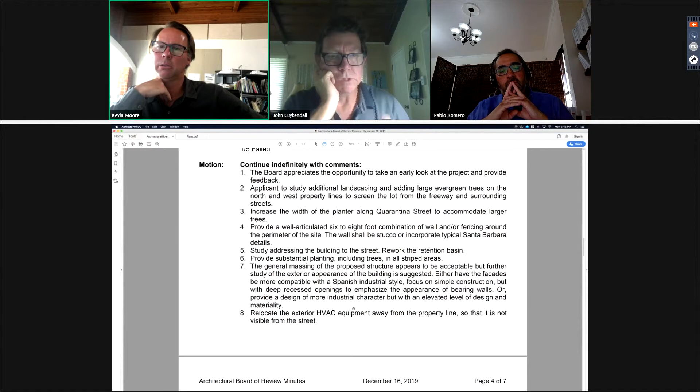Is that everything, or is there more? There's one more at 9. Okay. Applicant to study retaining the existing eucalyptus tree at the Quarantina Street entrance, study varying the sidewalk at that location to accommodate the street tree.

So thank you, Mr. Chair. We've taken all these comments into consideration, and we've come with a revised proposal. We've tried to address as much as we could accommodate. We've been working with a client on a new plan, and incorporating all of these comments.

I'm not going to go through the civil drawings, but initially we had a retention area in the front, adjoining the building. We've moved away from that, and everything's moving to underground chambers, so we can utilize the landscape area as such without mixing with any storm water.

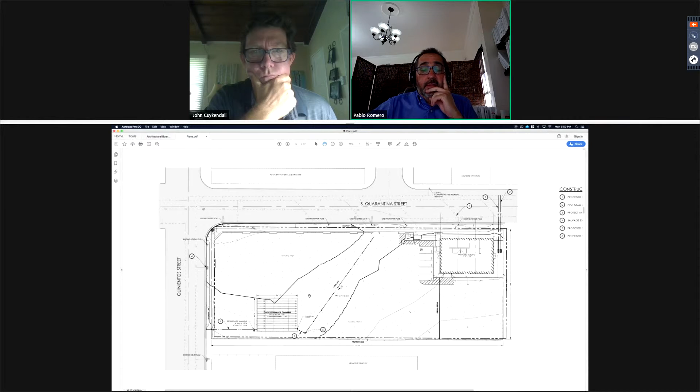So all storm water will be managed on site, but under the concrete paving. I would suggest we go to the site plan, sheet 5 on the PDF file, and zoom in a bit. So right there at the south end of the property, that's where all of our retaining structures will be concentrated. We've designed all the grading to drain in that direction.

We are providing details for the chambers, and basically that's what we're doing in terms of stormwater. It's all managed on site, nothing's handled in any other fashion, but it's all handled underground to maximize the use of the space. This is basically a staging area, and we want to maximize the use of the land for the client's purposes.

If we can move to sheet 9, that's our new site plan. So we've removed the use of that landscape planter area along the frontage of the building from any use for stormwater management, and we've turned it more into just a landscape area, just to provide more interest to the streetscape.

Part of what we've come up with is moving the building slightly towards the front of the property, pushed it towards Quarantina Street, and incorporated this planter. We've eliminated the fence line that we had parallel to the building, and relocated all the package HVAC units behind the fenced area, behind the screen, so the building becomes more relevant to the streetscape.

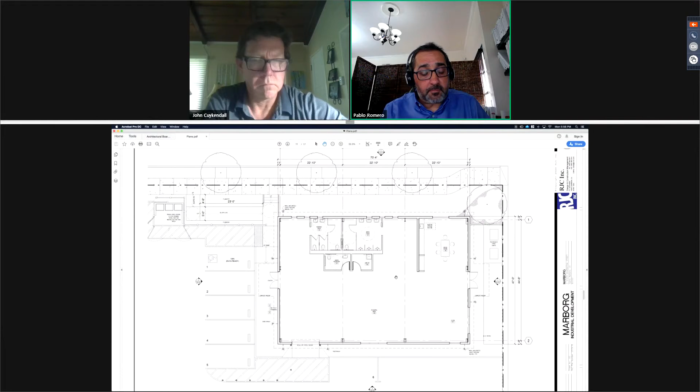Can we go to sheet 12, please? So these are the elevations, the raw elevations of the building without any planting. We wanted to provide you the naked structure - later on we'll see how it interfaces with the landscape. But this is, if we could zoom in the lower portion, the Quarantina elevation.

As I mentioned, we're still pursuing an industrial building because in the end we're talking about an industrial neighborhood. We're not proposing anything that goes against the image, the massing, the materials and treatment in the surrounding areas. But still, we're keeping simple lines yet attractive - this is the main facade of the building. HVAC equipment, as I mentioned, and any coverings are not visible from the street - everything's behind the screen.

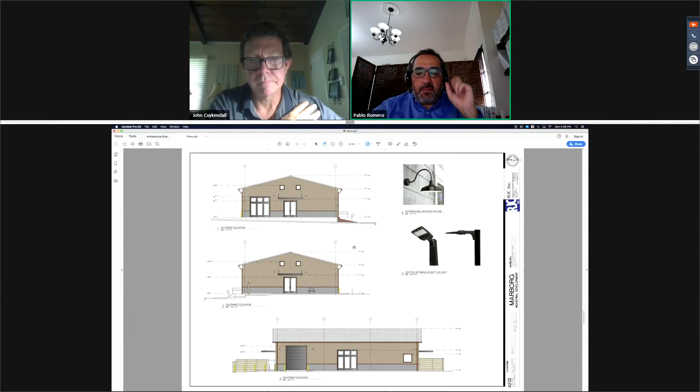If we could switch to the next sheet, please - well, these are the rest of the elevations, more internal elevations for you to see. If we could switch to the next one, that's where the perspective drawings are.

That prefab screen will be interfacing with iron picket fences along the entry points to the property. We are maintaining the visibility triangles. So along those, we will be providing picket fence, as well as sliding gates, all in iron rod picket fence.

For materials, we are using basically CMU block for the base, and then metal siding with metal roofing. So that's pretty much our proposal for the building.

If we could see the following sheet, please - this is more of the streetscape for Quarantina. We are representing this on a 15 to 20 year growth. That's actually what we are pursuing with the vines and plants we're proposing, as well as the street trees.

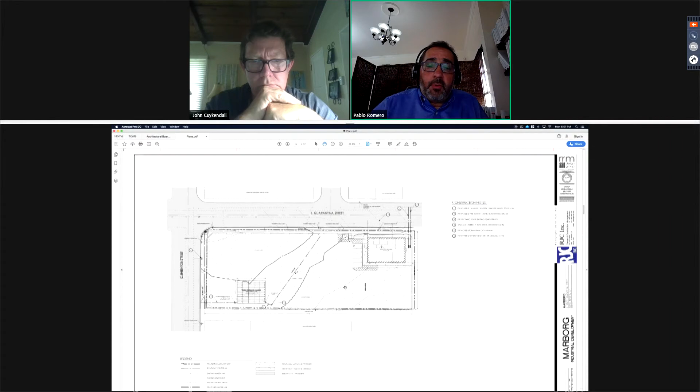So lastly, if we could go to sheet 4 - I'm sorry, sheet 5. I'm sorry, sheet 5. One of the comments... I'm so sorry, sheet 8. It's sheet 8 that I'm looking for.

We were asked also to explore the possibility of addressing this building as a Spanish Revival building. But we went back - although we had done some research and some walking in the neighborhood - we definitely went back and explored what was the imagery and the architectural language being used in the surroundings.

So we think our proposal is in compliance and matching the surroundings as best as it can. We just wanted to come back to this theme of the architectural style, and we see it that it's consistent with the massing, consistent with the treatment, with the materials, and with the imagery of the neighborhood.

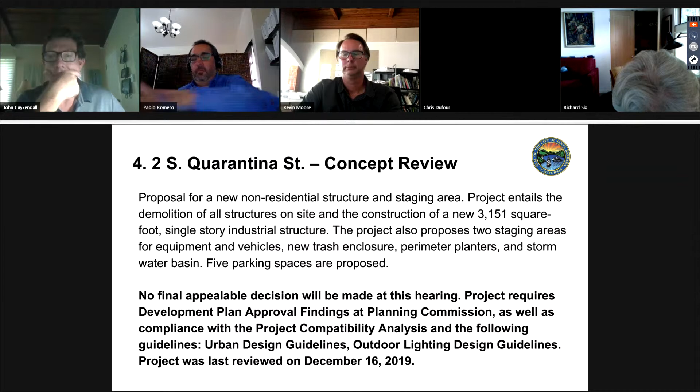Would you explain the visibility issues at the gate? The wrought iron gate visibly opens this yard to the street, but you're saying that there's visual pedestrian issues at the gates. Can you go into that? I know there's a triangle and so forth, but if the gates are solid, when they're open isn't that a visibility issue? Can't that visibility triangle be handled in another way?

The pedestrian access is completely independent from the vehicular access, so the visibility triangles are basically addressing the need for vehicles to incorporate into the street. But we don't have them interfacing at all, they're completely separated. I don't know if that's where you were headed. I'm pushing for some light material to make the gates opaque. Is that a possibility with the visibility triangles needed at those entry gates?

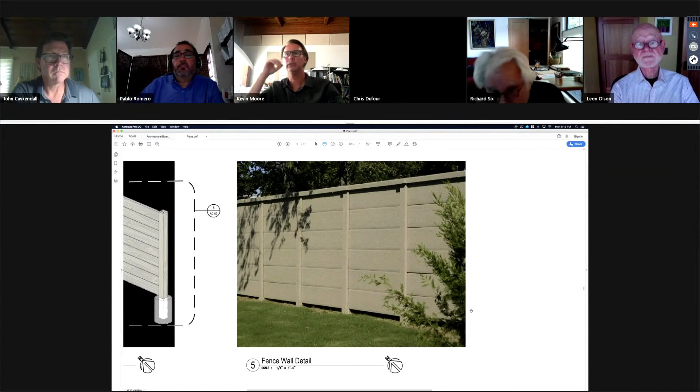Okay, Mr. Whelan, any questions? Yes, thank you. Is my camera on? No, it's not, I'm clicking on it and nothing's happening. We have reached our maximum. Oh, there we go. Reached your limit, that's what I thought.

Well, I may be coming to this project a little late, I wasn't in attendance when it was first presented in December, and I never heard the question asked that I'm going to ask now. What was the rationale for locating the building on that portion of the site?

Yes, thanks for the question. As I mentioned, most of the activity that we're consolidating in this building is happening in a temporary location in the adjoining property. Right now the company has set up porta potties, coolers and ice chests and what have you, and shades to provide a break area for their employees, basically on their way in to start the day, and or at the end of the day. So this is why we are pushing it towards the back of the property, that's basically the reason behind that.

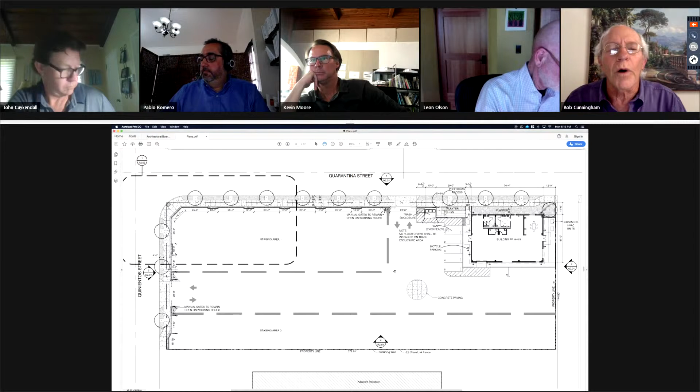I don't have access regarding the webcam because the applicant is still on. Give it a shot now. I'll just ask my question. Okay, I think the applicant addressed all of the points that we made during the first presentation, except for creating planters in the striped areas in the parking lot. I'd like to know why they decided not to do that.

Thanks, yes. So the reason is, again, we got big equipment maneuvering here. They might be using the area for parking the trash trucks at some point. We're also bringing in and out storage containers and what have you. So we wanted to leave more of an open area for the entirety of the inside, and we concentrated all of our planting efforts towards the frontage of the property, that's the reason behind it.

Okay, following up, the planter to, let's say, south on the plan, between the building and the parking lot, it appears to have some bollards along the edge of it. Is that what those are, those 5 black dots? Yes, correct. So that space would not be available for any equipment storage. It would simply be, I mean the bollards are there for some reason, presumably. Why can't that area that's protected by the bollards be a planter?

And then the other planter between the parking spaces and, let's say, Quarantina Street, the linear striped area, is that an accessible path of travel? Yes. Okay, and what about the area between your cursor there and the driveway? What is that?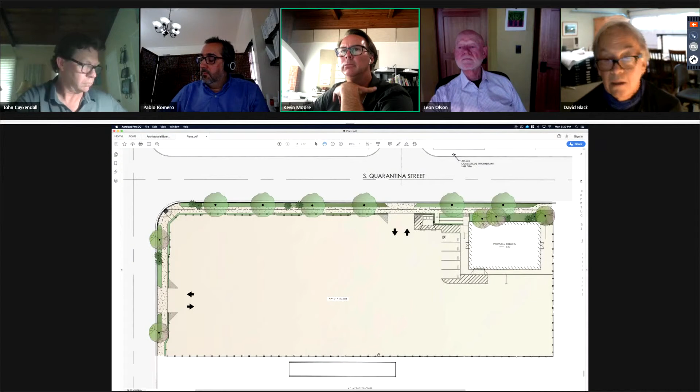Okay, Leon, did we get you? Got your questions? Yes. Okay, great.

My question is, so we're in the flood zone and it looks like you've designed the building to be raised, correct? Yes. Okay, what is that above the street level? How high up are you now with the ramping up? And is that incorporated into the elevation sheet as far as where street level is?

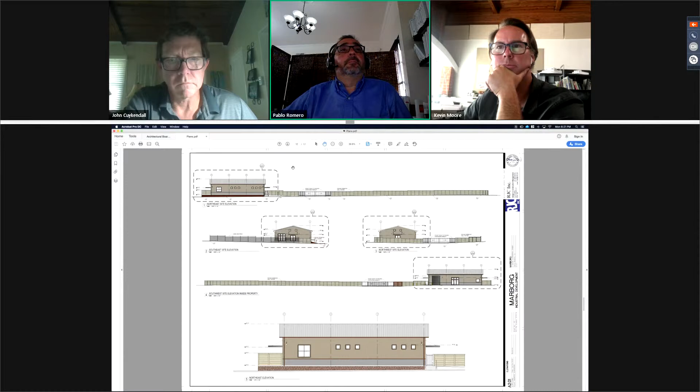Okay, there we go, you can see a little bit of the sidewalk. Yeah, you can see it on the actually on the, let me see here. That one, that's exactly, that one has the, it's matching the profile of the street. Okay, I'm handling 2 computers, but yes, our grade is

Yes, so say average of say 14 feet or so, so you're 2.5 feet above sidewalk for your finished floor.

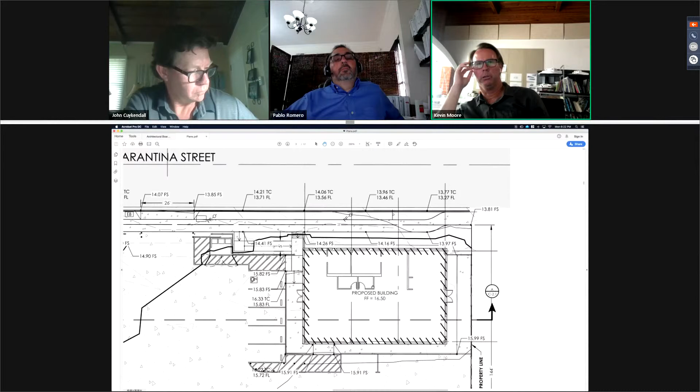Right, okay, all right. And then on your fencing material, the suggestion was made last time that it should be more of a wall. You selected this material for cost, feasibility, or constructability? What's the cost and time as well? Noise attenuation. Okay, okay.

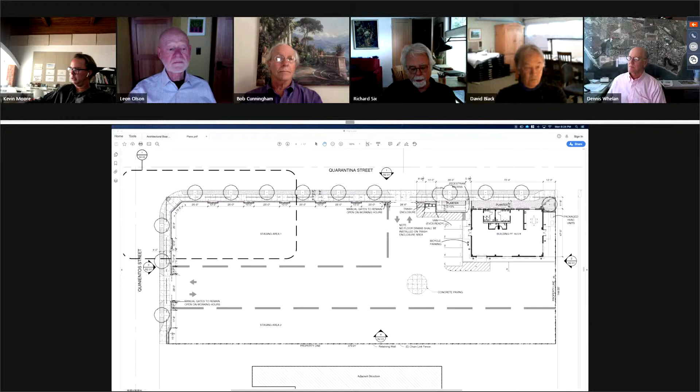Okay, Bob? Comments? Oh, we just lost you, Bob. I'm not comfortable with the prefab wall. I think the wall, particularly with regard to the fact that it's being connected to wrought iron gates, I just don't see that as being a good combination. I think the wall needs to be CMU with a smooth plaster finish, which can be treated with graffiti resistant paint. Oh, sorry, you couldn't see me.

And also, I really feel pretty strongly about adding landscaping in the interior of the lot. In particular, the one location that I pointed out that's protected by bollards. It seems like that's one spot where we could accommodate a fairly good sized tree.

With regard to proposed vines, I think the creeping fig always seems like a good idea until it gets so heavy that it pulls itself off the wall. So I would advise against using that plant. There are other options. But in any case, I think we need a smooth plaster wall. I just don't see this prefab material being anything that speaks of Santa Barbara.

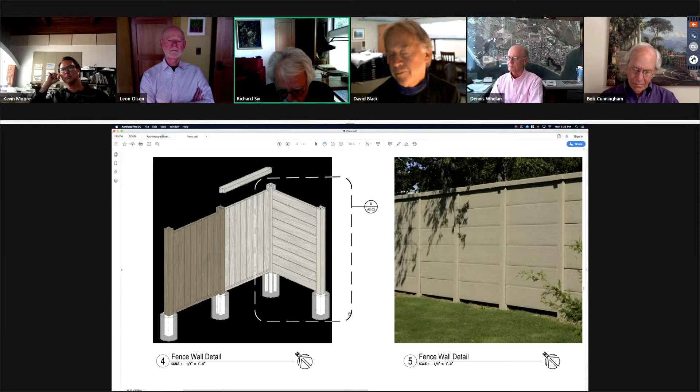And then the only thing I would say - if we go to sheet A3.2, on the very right-hand bottom corner - I studied the adjacent properties, and I think it would be best to have this solid wall continue to the back face of the building rather than stop short with the chain link fence, to give better screening of the yard from the oblique angle of the street.

And I concur with Bob's comment that in that area where the bollards are, in the striped area just to the left-hand side of the entry to the building, that could afford a tree and a planter and a significant skyline tree. Those are my comments.

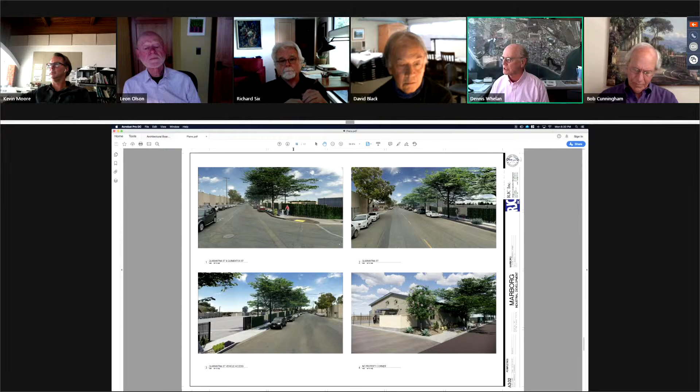Dennis: Well, I'm going to start off with a left field comment and then build back to that. I think it's unfortunate that the building wasn't located on the corner of Quinientos and Quarantina to relate to the other two buildings immediately across it and give some identity to the neighborhood. I think your selection of buildings was highly selective, because the MarBorg building right across the street on Quinientos is very residential, if anything. So I don't think there's a hard, fast defense that this is strictly an industrial neighborhood. In fact, there's a chance to change that right here at this project as one transitions under the freeway.

But be that as it may, that ship has already sailed, right? So this project seems to me to be less about the building and more about the fence. And the proposed precast concrete fence, especially in the perspective views, is almost unyielding and does not add a lot to the neighborhood.

So to that end, I would suggest going back to that detail of the fence construction, in the lower left corner - there's an alternative to horizontal placement versus vertical placement. Now due to the immense length of this fence, the horizontal line really emphasizes the length of the fence. I propose that if they were vertical, it would break that up.

Additionally, I would vary the depth of the interstices, or the reveals, to create bigger planting areas. And even more so, some different arrangement at that corner that would relate to the larger urban character, rather than just cutting it off at 45 degrees - creating a large planting area for maybe a feature tree or some other element. But that 45-degree fence arrangement really seems to turn its back on the neighborhood, where that very special point in the neighborhood should be featured.

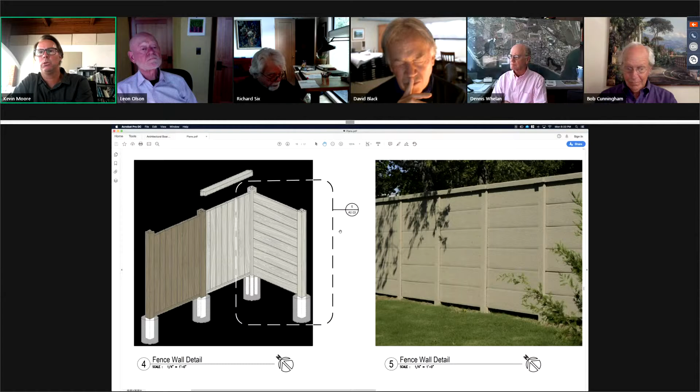Okay, that was my thought as well - if ultimately the goal is to disguise and camouflage this wall, then it may take some time, but the material ultimately may not matter. The upkeep of plaster versus this cement style wall is probably a lot easier with vines on it. And once the vines have grown in, I suspect you won't have an issue with graffiti. Obviously, I don't recall seeing an irrigation plan, but I think that would be something we'd want to require so the vines are sustained over the lifetime of this project.

My own comments are about the fencing material. It's a little unfortunate. It would be great to have some plaster, or at least portions of it be plaster, or something more interesting - maybe at the gateways or entryways - to show significance that these are the entry points, particularly the pedestrian entry, so as to at least give something back to the streetscape.

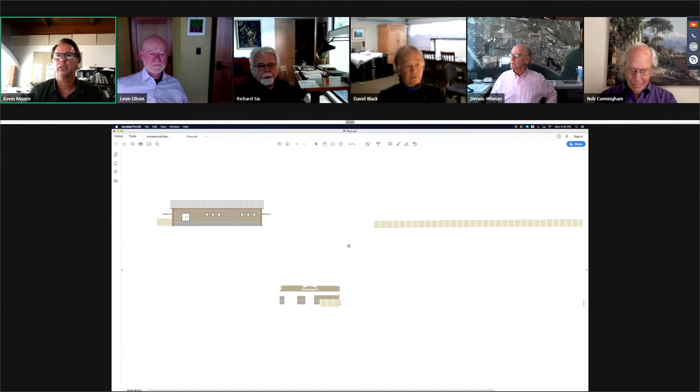Could we go to the overall elevations? I don't know what sheet that is, but I think that's the one. If we zoom in on the top left, there's a very minimal attempt to do something at the pedestrian entry point. At the very least, let's do something special there that draws the eye and shows some attention to detail. And the design of the metal building is very utilitarian - I guess appropriate for the location.

So, they are here for, let's see - Mr. Chair, concept, yes. I would like to add - go ahead, Matthew, one second Leon - Matthew has something to say. Just really quickly, I apologize, Mr. Olson.

This project still needs review by the Planning Commission. It does need a coastal development permit and development plan approval findings. So it is here for comments before going to Planning Commission. Of course, if the board feels there's still some work in the design that needs to be massaged, it can come back for another concept review. But just wanted to let you know it does need to go to PC.

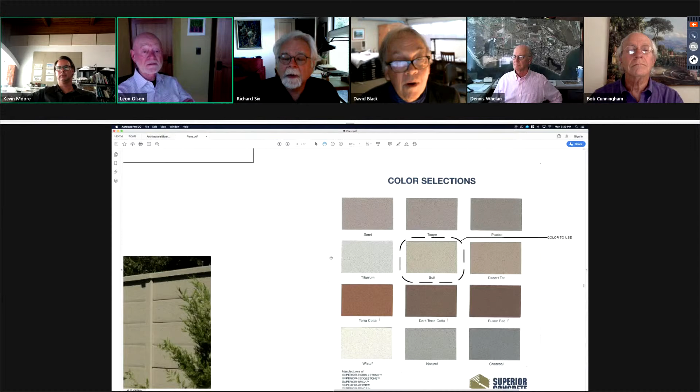But the reference to the green wall was, I think, Mr. Black's reference that what we're really doing here is a landscape green wall, not a paint color. I understand, but I was adding that painting it green as the foliage takes over would be better. Yes, I agree - you agree it should be green? Well, green or a dark color? Yeah, a dark color. We're looking at the options here - I would suggest a second tone for the insets to further my idea about breaking up the length of the wall.

I like that idea. Sure. Okay, well, maybe we could take a quick poll about the board's feeling about whether this is ready to go on to the planning commission for their review, or if we would like to see it one more time.

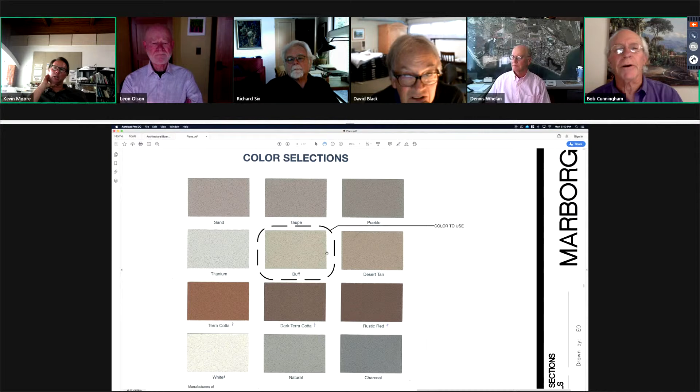So I'd like to add something regarding the wall, sorry to complicate things. I really don't like the idea of painting the wall a darker color, especially not green. I suggest maybe the applicant consider using a green screen material to accommodate vine plantings instead of the wall. If sound attenuation is an issue, something like that could be put in front of the wall. A green wall, I can't live with that.

Okay, well, I guess I'm getting the sense that the board is not quite satisfied, so probably not ready to give full positive comments for the project. So we may want to see this another time. I think we have to give a more solid direction to the applicant on this wall. And as a second point, I would want the applicant to promise that we get a mid-size skyline tree in the striped area behind the bollards before they go to planning commission.

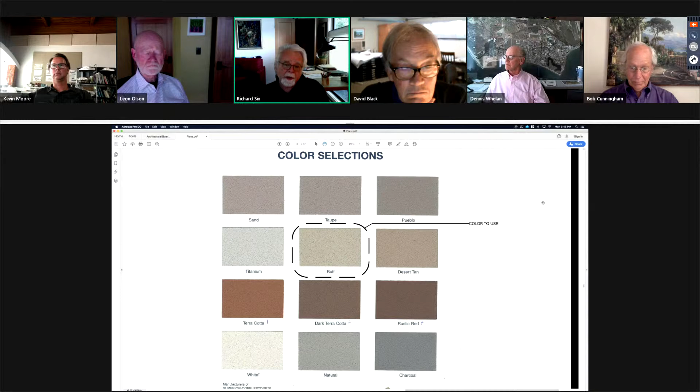And then the project preliminarily appears to be compatible with the compatibility analysis with the following: Number one, as far as the board is aware and hearing nothing different from staff, finds the project compatible with the city charter and municipal code, that the project's design is consistent with the design guidelines of this particular location. It's compatible with the architectural character of the city and especially the neighborhood, given the eclectic architectural character, including other similar industrial buildings. Three, it is appropriate in size, mass, bulk, and scale, given its one-story nature. As far as the board is aware, there are no adjacent landmarks or historic resources affected. Five, there are no public views of the ocean or mountains that are affected.

And with the addition of an internal skyline tree, the open space and landscaping is acceptable given the extreme unique use of the property. Okay, so is there any more discussion? Just one last note I made about the number of street trees, want to be consistent with the site plan. Yes, I'll accept that, thank you.

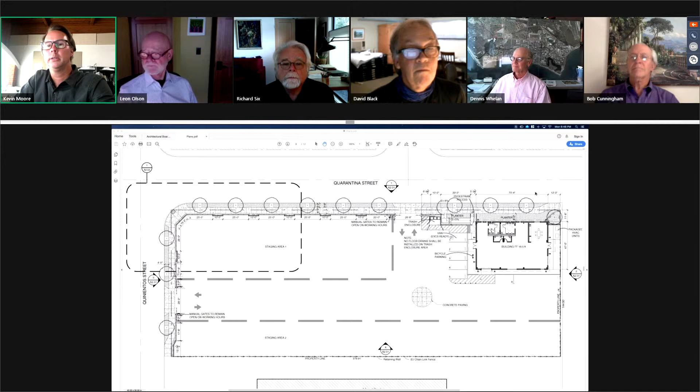All right, this is Mary, I'll take roll call. Chair Moore, yes. Vice Chair Six, yes. Board Member Black, yes. Board Member Cunningham, yes. Board Member Olson, yes. And Board Member Whelan, yes. Okay, motion passes.